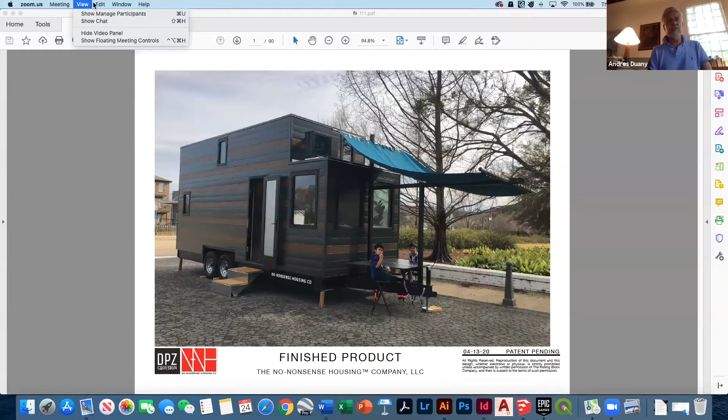Let's talk about how that manifests in these units. The first thing I'd like to show you is something I've been talking about for a long time, which is something that Liz said: the one universal form of adaptation is retreat. You basically move away from trouble.

One way to confirm this: Alex Krieger at the Graduate School of Design at Harvard gave a very good talk two days ago, speaking about how Americans actually solve their problems by leaving England, by leaving the East Coast, by leaving the older cities, and establishing new towns and new suburbs everywhere.

He said it's not for us to stem the leaving, it's for us to make sure that when people arrive somewhere, they land in a good place. He also said small cities and towns actually have a future, which is something New Urbanism has been talking about for a long time.

This little unit here, which we designed, is a tiny house. It's extremely comfortable, 230 square feet, licensed by the Department of Motor Vehicles, so you can actually park it in a parking lot and take it away from trouble.

Trouble isn't just about moving away from a flood. Trouble lasts a long time—to rebuild your town, to wait for your insurance—you can actually move away with one of these. It also turns out these are popular when you have disease.

So we call them isolars, which is Spanish for isolate. You can actually live comfortably in these, parked in any parking lot.

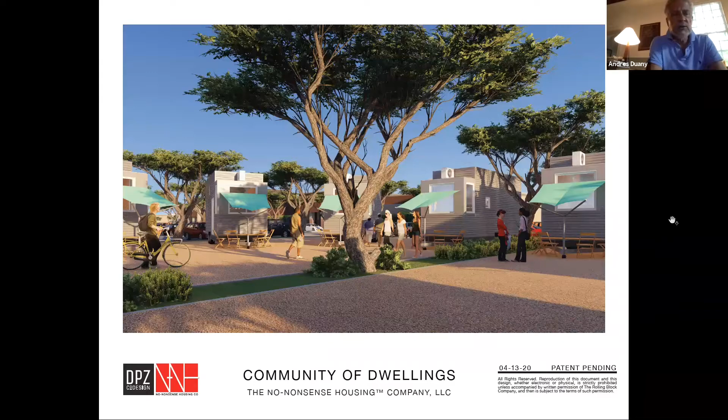There's an infinity of parking lots available in America that are not being used. They're perfectly drained, they already have footings, and they're looking for a use. A lot of these parking lots are also in downtowns, waiting for the next high rises that are not going to come for a decade or so.

They can be very sociable. By the way, these are not inexpensive units—they cost $70,000. They really are not for the homeless. We also have homeless units, but these are actually for people who have jobs, but in a gig economy, they may have to move.

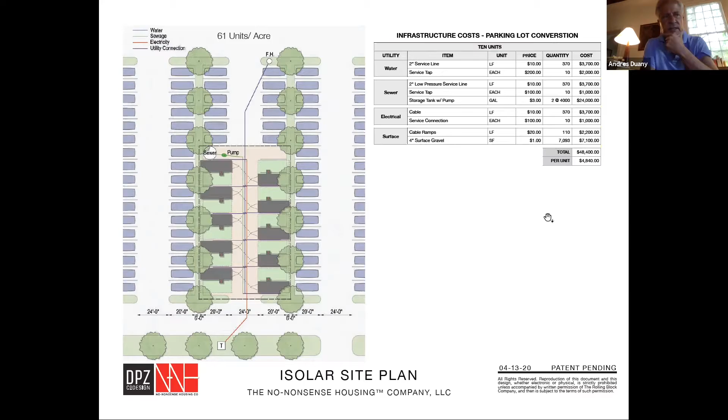This is a more typical arrangement here on the left, where they sit on a standard issue. One of the great things is that parking lots are absolutely standard all over the United States, so they can be leased.

Now, this is a project that was finished and accepted by the city of Vero Beach. It's a very large site on the water where they've decommissioned a power plant and a sewer plant, and we were asked to design a place for people to gather.

We designed it with very naturalistic landscaping—very ecological, lots of wetlands. It was all about crowding, about how do we get people in festivals to be face-to-face. It was all sociability.

By March, we realized that was ridiculous. I couldn't even make a presentation about that kind of human density. So we redesigned it, and quite a few things came up.

The pools and the wetlands—the wetlands became a pool. That very large pool in the middle is actually for the children of the town. There are hundreds of kids, and they don't necessarily infect each other, but they have to have a place to go. By the way, these are for the regular kids of the towns, not the rich kids.

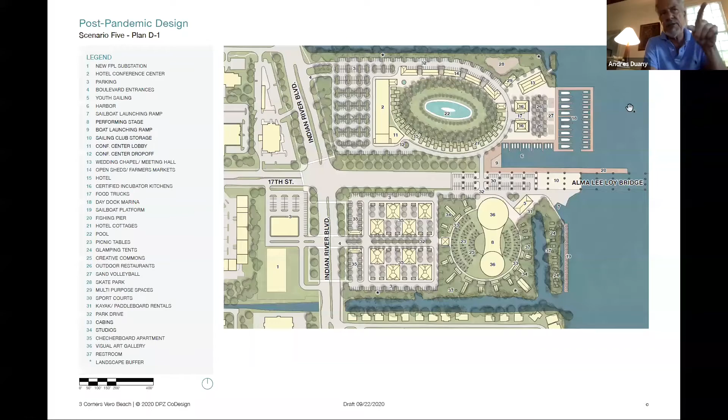There's a sunny area all around it, surrounded by a grid of trees and palms on 20-foot centers, which, if you imagine a blanket or a picnic table on the ground, is the use of landscaping to separate people automatically. A 20-foot grid is too tight for a shade tree, which is why we alternate palms and trees, so lots of people can sit by themselves.

On the side, you see the circle of small units? That used to be a hotel. Now it's a bunch of cottages, because the hotels are all dead. No one wants to share elevators, no one wants to share aisles. The cottages, which is actually the original way of hotels in Florida, are a completely different market segment. You're on your own, you can open your own windows, you don't share air conditioning. So that's a new kind of hotel.

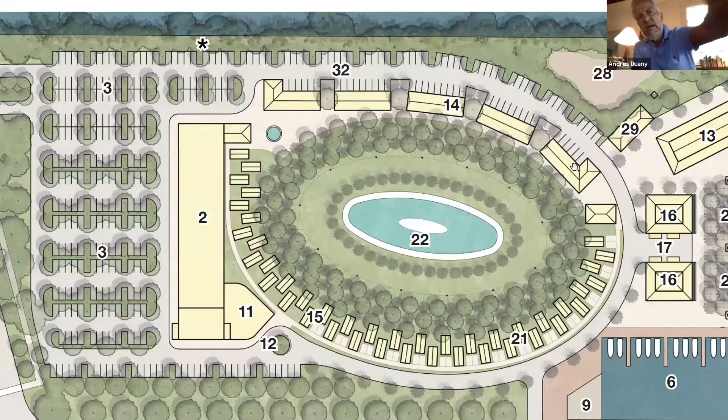Over on the back here, these are open market buildings. Some have a little bit of air-conditioned space for administration, but they're open market buildings. Trucks can pull in not only for farmers markets, but they're multi-purpose spaces. All those 14s are multi-purpose.

Over at 13, there's a civic building that can be used as a wedding chapel or for City Hall. What we did is take, imagine the Seaside Chapel, but put a big skirt on it that allows doors to be opened. So it's all about opening.

By the way, here, number 2 on the left, we knocked down the plant but not the turbine hall. This is a beautiful tall turbine hall, which is a conference center. Because it's thin and one big room deep, you can open it for cross ventilation.

16 are two restaurants at different price points, mostly open space, mostly outdoors, and they're fed by food trucks in the middle, so they alternate.

And then over here at 26, we have a sitting area. Perfect spacing occurs at 10-foot grids, 10-foot centers, and that can also be done exclusively by palm trees.

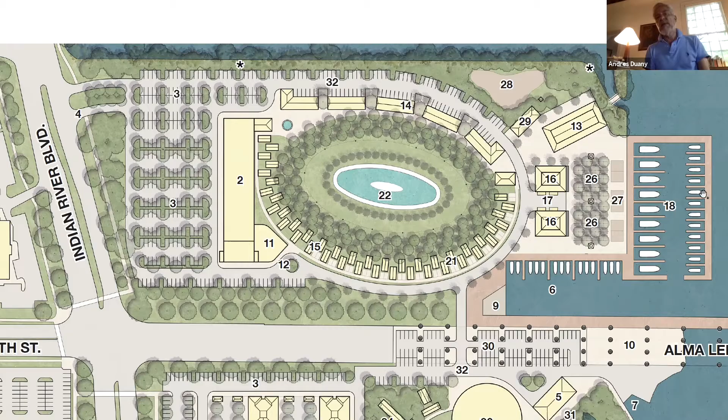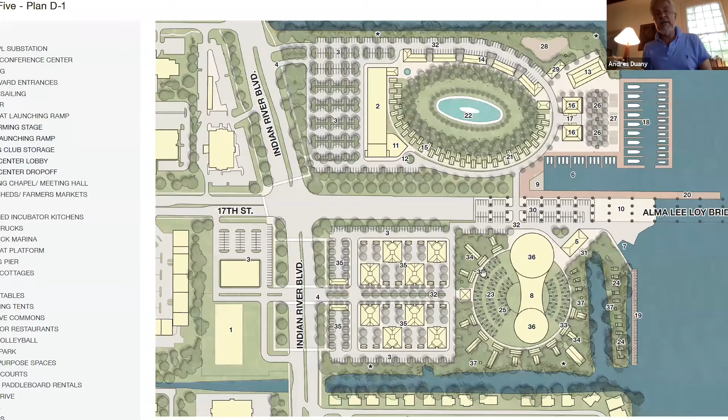Now on the other side, to raise funds, there are apartment buildings, as you can see, on a checkerboard, just 4 apartments to the floor. There's almost no lobby space, no elevator, they're walk-ups—I'll show you the plans later. Every one of them has cross ventilation, and the parking lots are actually turned into courts. You can see those courts, but they're not aligned, they don't share party walls, and there's a single means of egress.

Over on that circular part, those are two empty clean water tanks. We put an awning across it as an open air stage. Instead of having people sitting and keeping them apart, those are all little picnic tables. I think the great tool of urbanism is going to be the picnic table. It sits up to 6, it can't be moved, so the spacing is automatic—you sit 6 at a time. By the way, if you put a footing on it and it's a really good concert, you can actually dance on the table. That's pretty cool too.

On the side, they wanted to have a visiting arts group. What you see here are the thin houses, 2-bedroom, essentially mobile homes, but nicely designed. And in the back, just like Chautauqua, New York, there are different studios for dance, for sculpture, for painting, for piano, for different musics, for ballet.

Now this brings up an interesting point. If we're going to have a one-room schoolhouse, we're going to need school teachers who also isolate with their families. This could be a typology, not just for music teachers and summer festivals, but actually this might be a school—the teachers living with their dozen students, with their classrooms right behind.

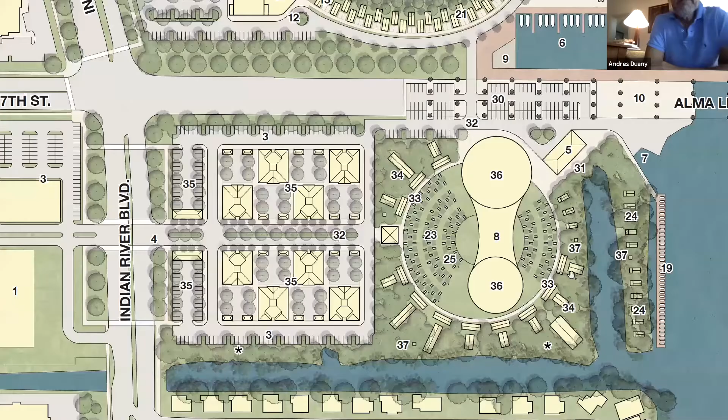So here you see it from the air. I think you can identify everything that's happening—there's the turbine hall, you can see the little hotel with the cottages, you can see how wonderful this grid of trees is, the open air markets, etc. And on the other side, what I described, picnic tables in perfect spacing, and the apartment buildings. It's a totally new kind of park—neither new urbanism, nor landscape urbanism.

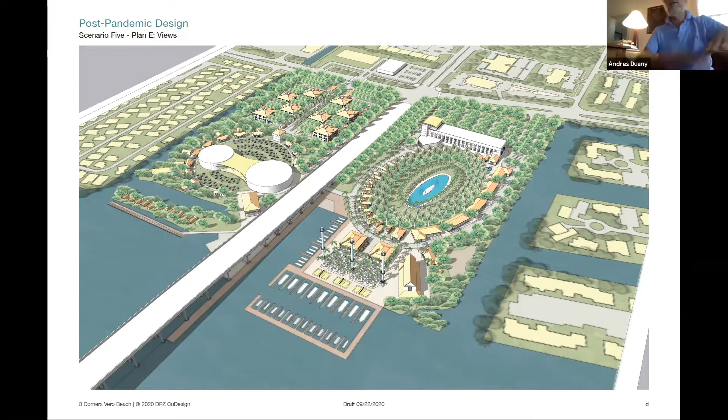It's more like the formal French park with the bosque, the grid of trees being the fundamental element of design. It's all about light, air, and sunlight. You see here, here is the outdoor dining on a 10-foot grid of palms, works perfectly. You can see the outdoor restaurants.

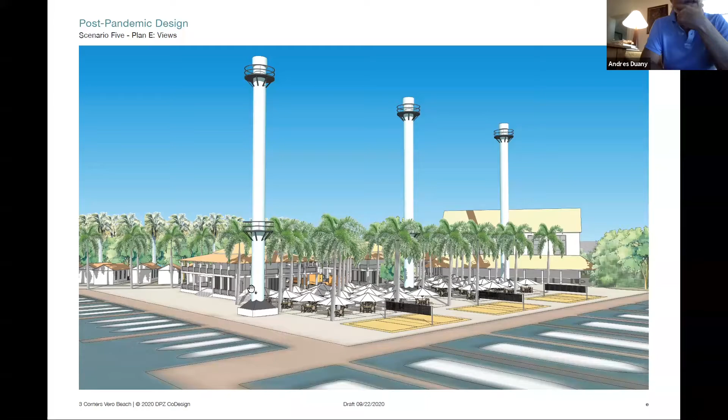This is the old chapel based on Scott Merrill's chapel at Seaside, but it got a big skirt so people could hang around outside and French doors could really open.

This is a typical market building, big overhang, trucks can pull up, and a little bit of air-conditioned space for administration, etc.

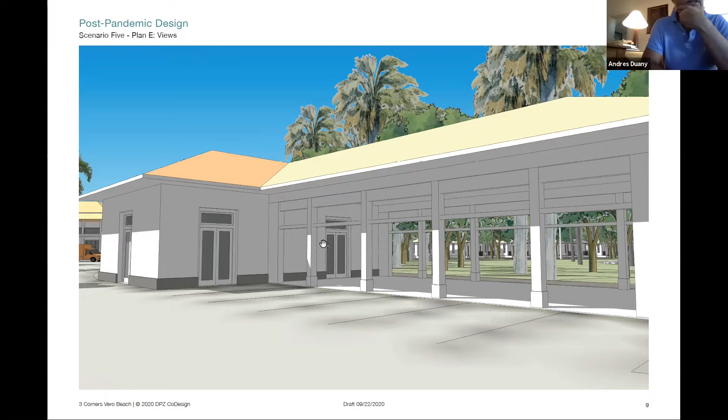These are the restaurants, open, open, open. Originally, they were all open, there was no internal space at all. But someone said that in case the pandemic did get over, we may want to have our own kitchens and not just depend entirely on food trucks.

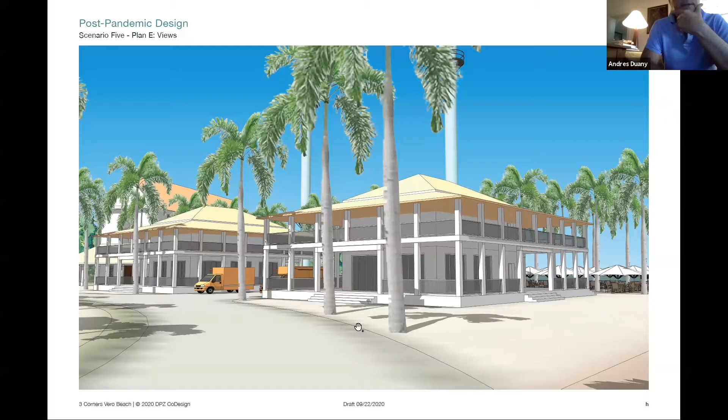And this is the hotel. By the way, this seems amazing, but it parks itself in those little indentations. Not only do you get little private backs, but you get terrific parking.

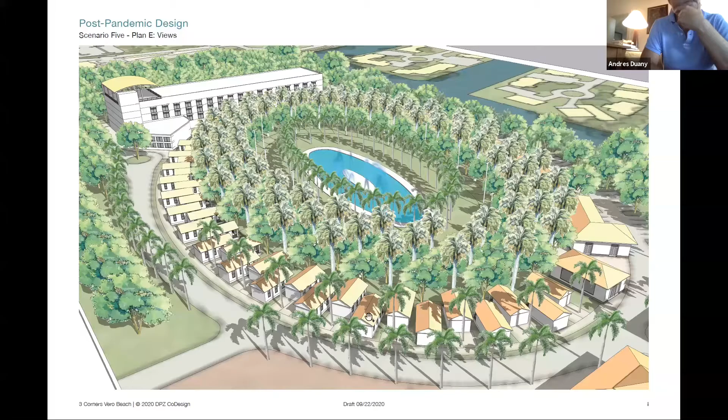And roof gardens, roof bars on the top, that's one of the great discoveries. It's happening all over Florida now, bars at the top. By the way, all this can only happen in Florida climate. Don't try this in North Carolina because you lose half the year to the cold. This gives Florida a tremendous advantage. The combo of light, air, and sunshine year round makes Florida a very good place to design for.

There's the pool. I don't know what the precedent for this is, probably Venetian Pool in Coral Gables, but it actually reminds me of a pool I played with as a child in Cuba. It was just a huge, shallow pool full of children, and it had an island in the middle. Now that island at night can be a water feature so that people can also come at night to enjoy it.

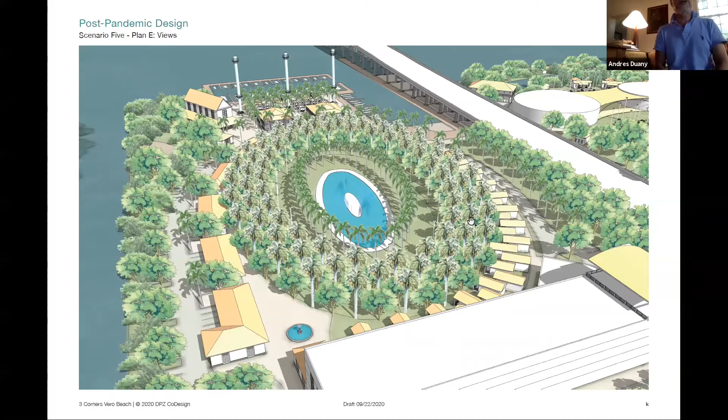There you see the apartment buildings in the back with the perfect ventilation and also the picnic tables in front. And there's the school with its classrooms and dwellings for teachers.

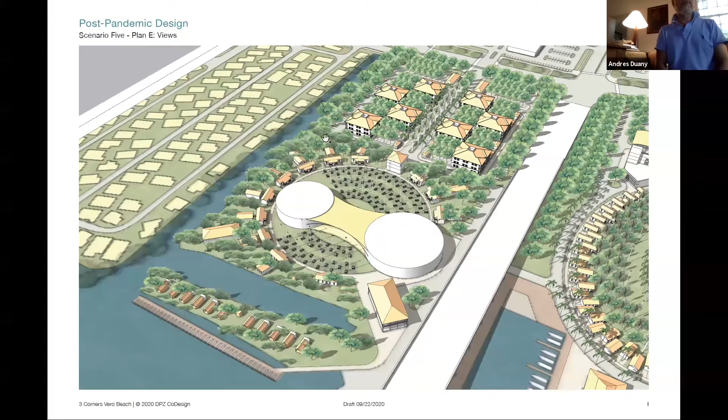Detail, glamping. New kind of urbanism, which is not packed tight, and the parking lot is used creatively. The parking lot is not always in the back, it's sometimes in the front.

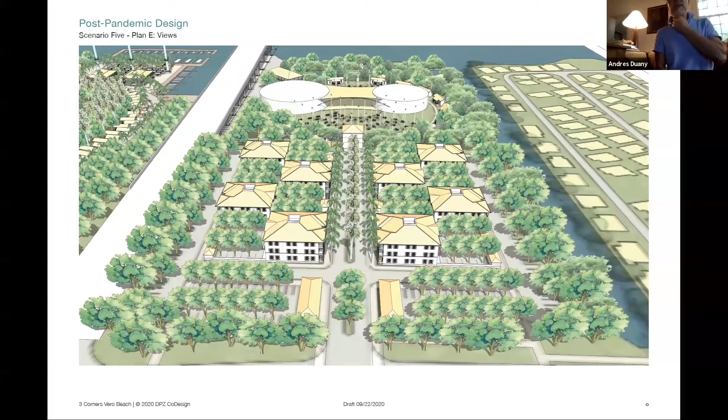It's like the forecourts of Paris, you see how they work? So there's parking lots with trees. The buildings don't have to face each other 10 feet away.

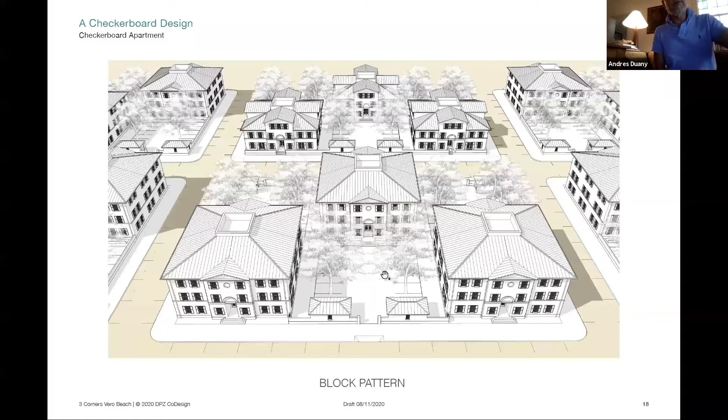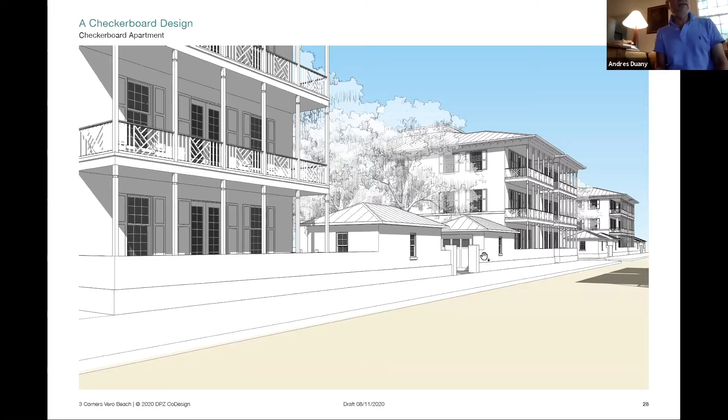And this is what it looks like from the ground. The key to this is that the first two cars are parked in indoor garages, so they're masked from the street. You really don't see the parking lots, and they actually act like very elegant forecourts. It's a nice street.

Now this is a hypothetical town we designed for Colorado that brings up a whole lot of interesting issues. It's one of the places that might be a receiver town, or perhaps one of these towns that people flee to. I could speak an hour on it, and I have, but very quickly, what I want to bring out here is that there are different levels of governance. So this is a town of about 8,500 residents, and it's got things you recognize.

It's got a solar field on the left, energy harvesting, and then food harvesting on the right. It's got recycling in the gray spots in the corners, and it has a central green, very open, with let's say shops and restaurants, etc.

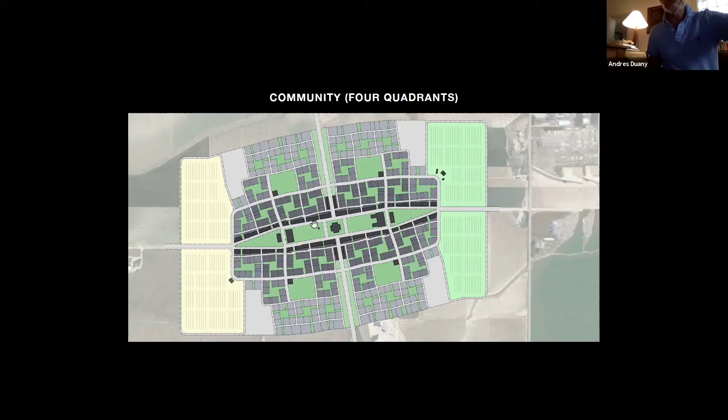Now it's got 4 quadrants. Each quadrant has a green, and that green is governed by the people all around it, and they decide what happens on that green. It's large enough so they can decide if they wish to have their own school, their own market, or whatever they want, sports fields, etc. So they can decide at this level of about 2,000 residents what they want at that point.

Now each of these little things is the next scale down. Each of those is a compound, so 8 of those made what I just showed you. Now, 8 of these, it's fractal, 8 of these make a smaller green in which a different set of decisions can be made. For example, they can have an open air pavilion, a little garden, and above all, I think they'll probably decide to have a schoolroom.

But whatever it is, they are funded by a portion of their taxes to decide at that level. Those are called clusters of compounds. That's a cluster of 8 compounds.

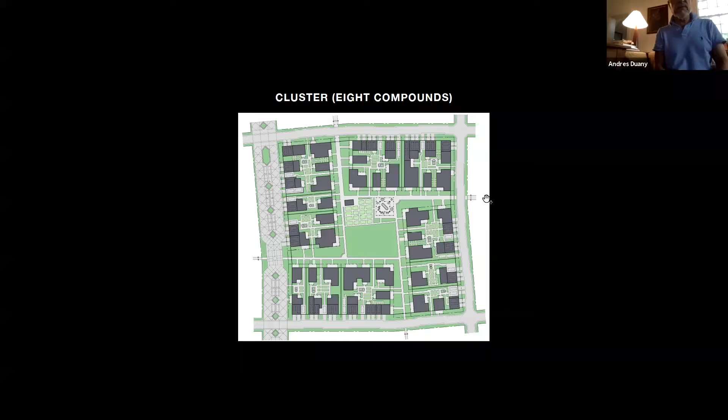Next, each one of these that you saw is a compound. That's 120 feet by 120 feet, and you're allowed to build up to 6 buildings.

A person can decide to assemble their own society or household in such a way that is self-sustaining. For example, you might decide to have 3 generations, or 2 workshops, and house your workers, 2 or 3 people that are great carpenters working in your mill shop, or a couple of young people to protect you, tough guys or tough girls, and people to take care of your grandmother, caregivers.

But the idea is that the compound in the future becomes the fundamental dwelling. The other thing that comes up here is the garage actually becomes the front.

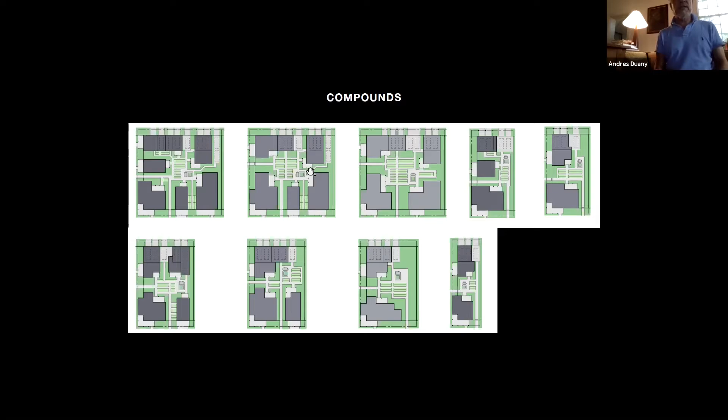Okay, let's see the next image. See this image here? So what you're seeing is a walkway. There are really no streets. What you have are walkways that connect to each other, but also the garages face the alleys. And those garages are those convertible places that I showed you last time that could be the workplaces or anything that you want. So this is the fundamental reversal of the new urbanism.

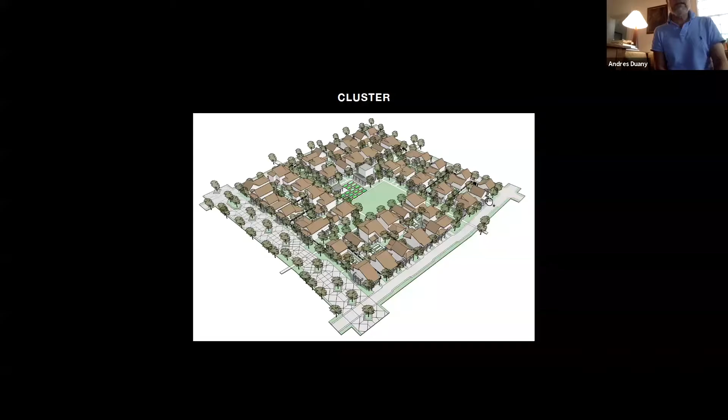This is a cluster of 8 compounds. Next, here it is developed in an East Coast manner, more East Coast architecture. This was developed actually for Oklahoma, for a client that we have there. This is what fits in 120 feet by 120 feet.

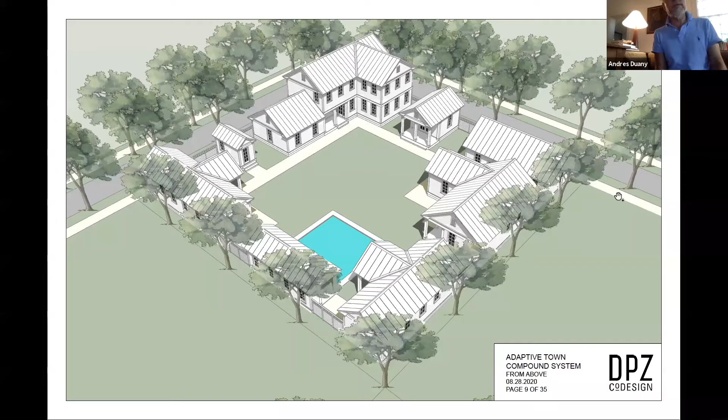And there's a lot of choice on these units. These are different programs that are being placed in this 120 by 120. Next, here's the choices. You can actually select a main house. These all have different programs, from a full house with bedrooms to one that just has public rooms, the second one. There can be dorms, houses that have nothing but bedrooms.

There can be garages, which are nicely designed to be convertible to other things. You can have retreats, places where you can store your groceries for all the dwellings, places where you can retreat to be yourself to work, places that can be small schoolhouses or workshops. And then finally, you can have a bit of a recreational place that's shared. Of course, everybody has a porch, but you can have a place that's a pavilion with a pool. And you get to select these, and you can see you actually are taken through this piece by piece.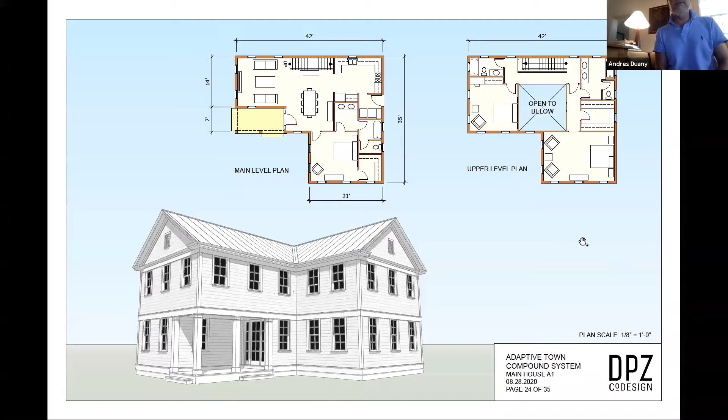Next, this is a house that has no bedrooms at all. It's a house that's designed to be just the center of the whole compound. No one lives in it. It just has a big screen, big eating, big kitchen.

Next, this is what we call dorms, just these places where you can very inexpensively buy additional beds. They're dependent upon going elsewhere for your meals.

Next, and then these are the garages, which I think are fundamentally important, as you've heard me say.

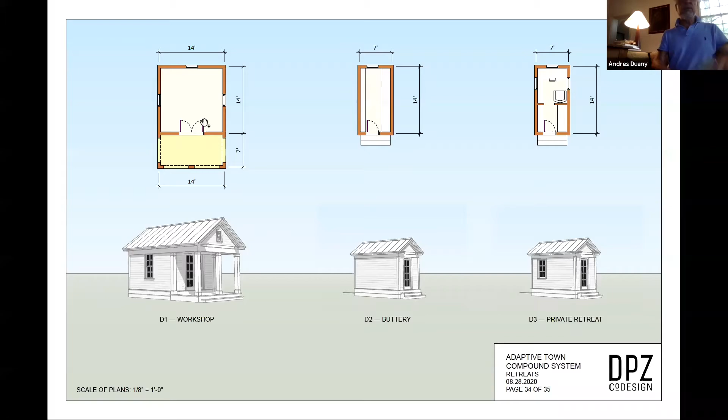Next, these are the various retreats, little places on the right. That's a writer's place, you see. I've seen, that's John Updike used to have one of those. And this is a larder on the left, and this is a classroom. But there are many others possible. And they each have a price.

Next, and then these are the pavilions, in this case associated with pools. Next, and so you're taken through it.

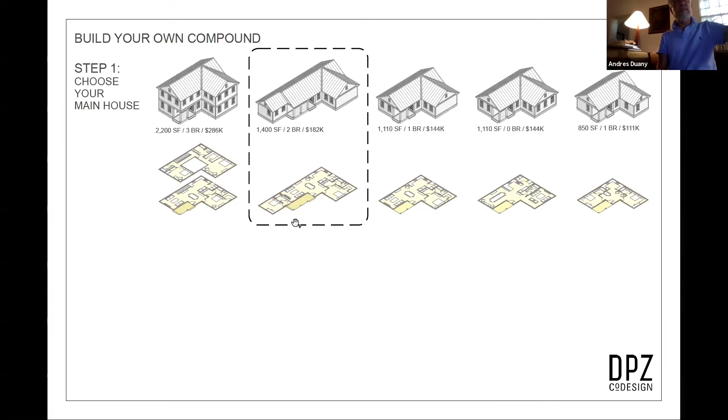Step one, choose your main house. And so the potential resident chooses house 2. They know it costs, it's 1,400 square feet, costs 182,000. They know the program. And you take step 2, step 3, step 4. You get taken through every one of those types, and you assemble your society.

So here's what these people chose. They chose their main house. They chose 2 dorms, which you can see there. They chose both garage types, they wanted 5 of them. They chose retreats, and they chose the large pavilion. Then you assemble them into the 120 by 120 compound.

So this is the fundamental element of society. It's not just the household. What happens now is that there's nothing between your dwelling and City Hall.

Like if Liz and I want to do something in our house or on our street frontage, it has to be done at the level of City Hall, and it has to become generally applicable to all of Coral Gables, which is to say it's impossible. But there's a series of decisions that should be made in a subsidiary form. The compound makes a series of decisions, the cluster makes a series of decisions, the pod makes a series of decisions. And then some decisions are made at the level of City Hall.

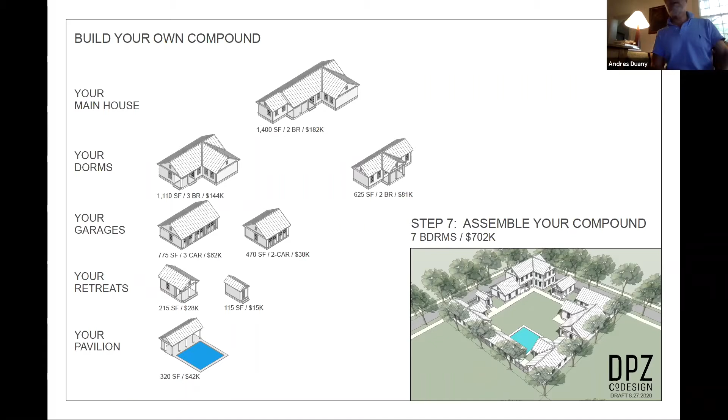This kind of programming is extraordinarily important, I think, in the future. It should already be happening anyway.

Next. And so the inside is like this, very standardized details to include, to make things easy to build and to price them properly.

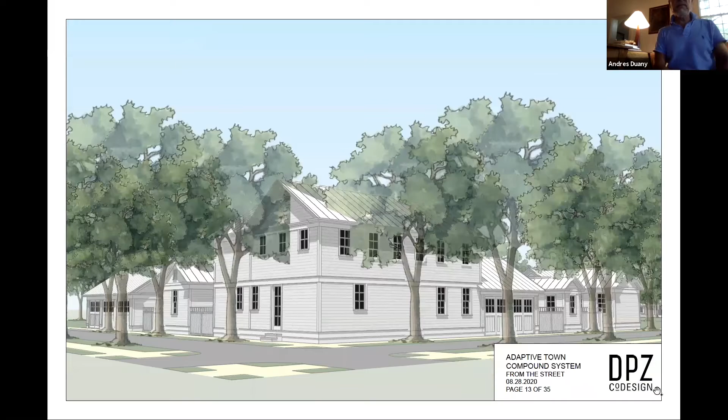That's the big house. Notice, by the way, that the compounds tend to look inwards. That's an alley that you're looking at, but they tend to look inwards, and that bothers some people.

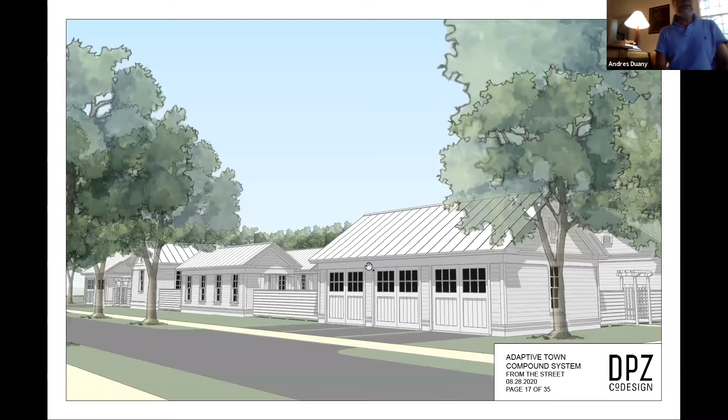These are the garages, which you see are very nice looking and convertible. But there are entrances, it's not so much backwards. This isn't that different from first-rate suburbia. It's not porch oriented; the porches are towards the inside.

Your society consists of up to 6 households, primarily. Now people say, well, that's big and that's expensive. What's the smallest possible compound? Well, we designed this one here, which I believe is 30 by 40.

30 by 40, it's got its own internal yard, its own internal courtyard. And it has a very economical living and dining room with a screen, a TV that rotates or 2 screens, and there's a kitchen. There's a master bedroom on the left, no holds barred, and there's another one on the right.

But you can also, very easily and at almost no cost, cut it into 2 smaller bedrooms. So now you have a unit that's about 800 square feet, absolutely secure.

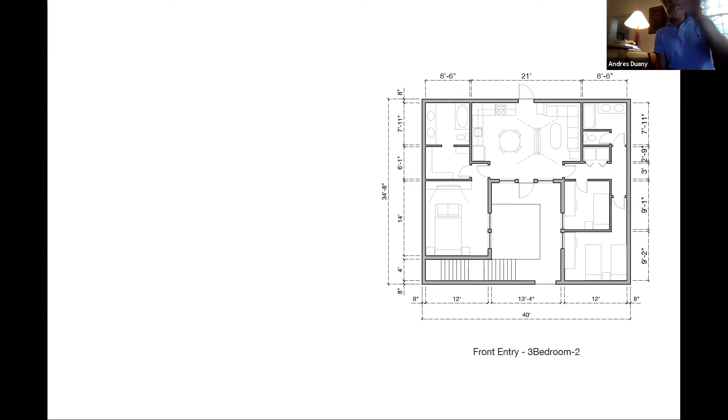It's got no windows facing out. You have your own courtyard. You're ready to go and not bother anybody. You can have a hobby in there. You can have the kids run naked in the sun. You can actually protect yourself from marauders. Whatever your scene is, you can do it internally.

Now this is the smallest and cheapest. There's your little house. It's got a sloped roof. You can keep your own water. Very inexpensive to build, and it confronts the street with awnings, which cost $7 a square foot. They're really great, and they're really good looking. So that's what you have for your street.

This is one that doesn't grow, this is just the kernel. This is essentially affordable housing for tough places. And by the way, the tough places of the future aren't just going to be Detroit, they're going to be tough places everywhere, with migrants everywhere.

Next. But you can also buy this unit. This is a very similar floor plan, but it has a thin layer on it that contains stairs to the rooftop, and also some storage for machinery. And the wall comes forward to enclose an area that can actually be a forecourt that protects your cars, so your cars can park in there.

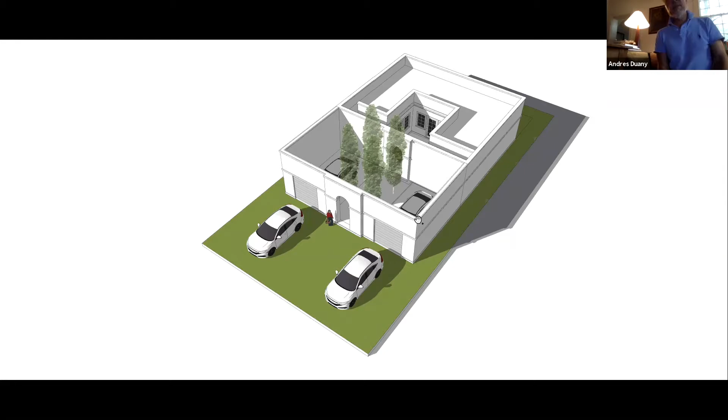But the cool thing about this is that it's a convertible space. So this is a house in which you can actually infill the front with the program that you want. You can infill the back, there's some setback in the back, and you can infill on top. So you can create your own compound.

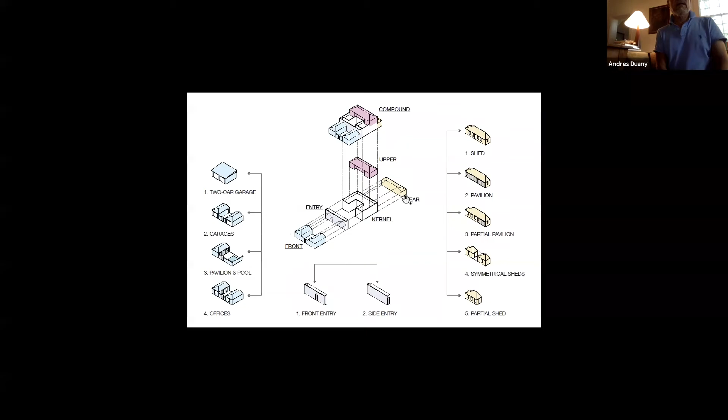Next. Okay, so this is what it looks like. There's the kernel. So there you see the kernel in white, and you can see what you can do. You can put things in front, you can put things in back, and you can put things on top.

Up to 7 bedrooms and 3 dwellings. It can be even more, but it's very easy to make 3 separate dwellings and 7 bedrooms. And that actually assumes you're not converting the garages in front. If you have those 2 wings in front convertible, you can have 2 more dwellings and 2 more bedrooms, because there still is a 25-foot setback in the front.

But look at the kit of parts that you have: garages, pavilions, and pools. You can have partial and full pavilions, little outbuildings in the back, ADUs to your heart's content, a whole dwelling on top where you can run your business from the upper floor. You see what I'm saying?

Now, guess where this fits? This fits on a 50 by 100-foot lot, meeting all the setbacks: 25 to the front, 5 to the side, 10 to the rear. So yes, you can build your own compound in a standard American 50 by 100-foot lot, and it doesn't even need an alley. So compounds aren't just for the wealthy in Hollywood or just for the famous. Actually, this is a delightful and very flexible way to live.

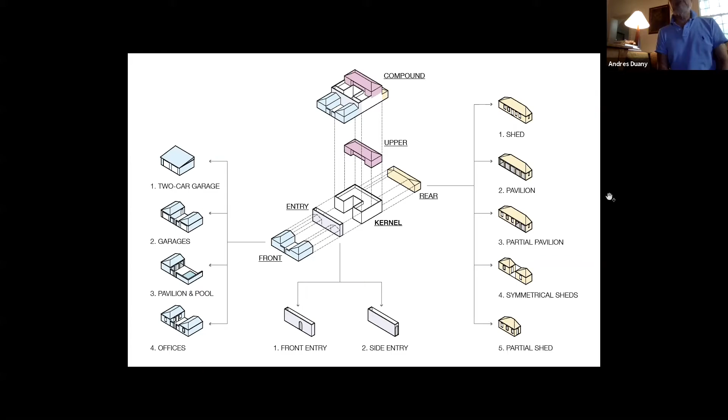We immediately were able to deploy these ideas. This is a project we did in the Philippines that is very similar, so I'll hardly describe it. The only difference is that security is much more intense in the Philippines.

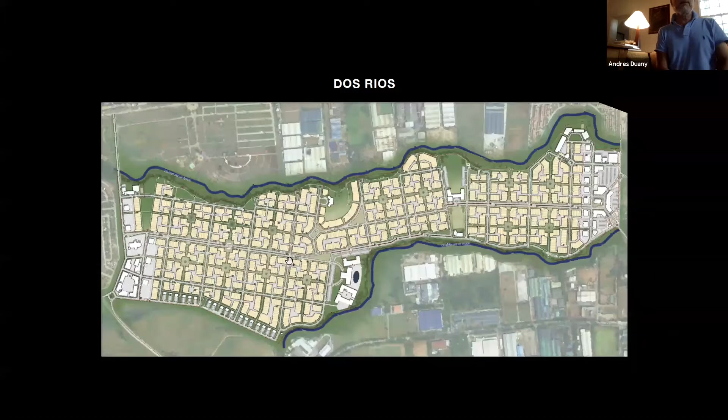So this is the project. It's quite huge, between two rivers. It's called Dos Rios. You can see the basic increment, the pods, and how they aggregate. You see the systems exactly as I described in the Colorado project, but much more elegant and much more serious about security. So there's the compound, the block, and the section.

The red line is the security perimeter. Most of it is built privately. If you look at the compound on the right, as you build your houses, you have to be able to secure the edge that you're given in red, and four of them secure that. Then there's an additional level of security, at which point you can have a sereno, basically your own policeman, your own maintenance people, etc.

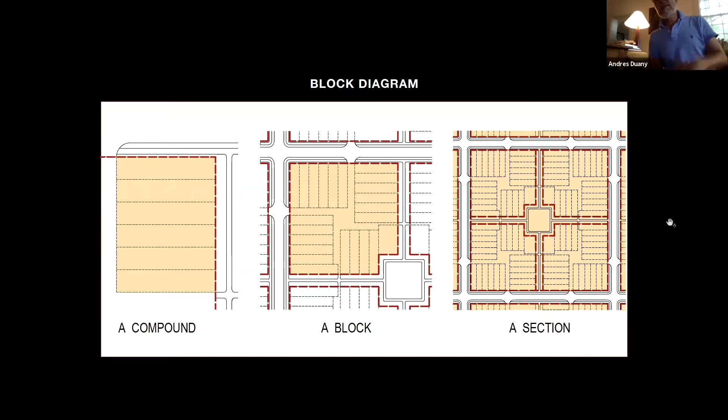So in a place like the Philippines, where governance is really melting down, they're really pioneering what might be our future. And these are the floor plans.

They can be courtyard houses or not. They can be very large, they can be very small. One of the nice things about courtyard houses is that you can mix incomes very easily. The alley on the inside here is, of course, going to be the playground for the children, that's where they meet.

The kids don't play on grass, they play on pavement because they have wheels. That's what they do now, they love wheels and skates and so forth. So imagine that the pavement is like a square and it's shared by everybody.

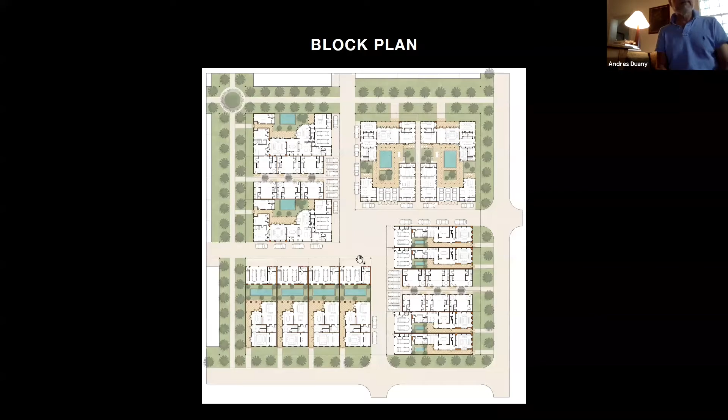And by the way, it's highly overlooked. This is not our standard alley - you see the balconies facing the alley. What I love about the alley is that nobody bothers you about it. The traffic engineers in the Green Book have nothing to say, and there are no setbacks required, so you can really design tight, intimate spaces.

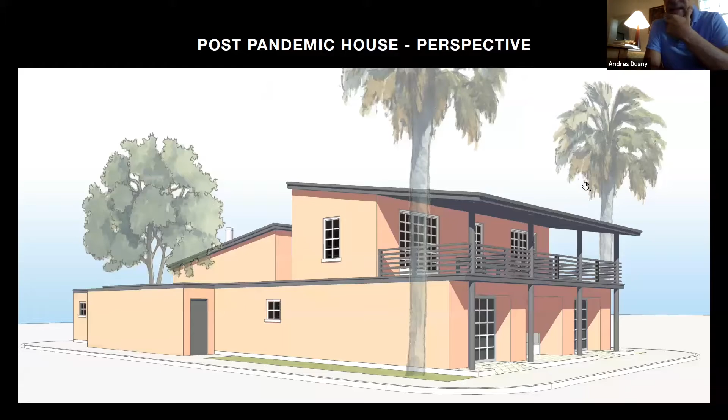Now, this is a house, it's actually just a post-pandemic house, and it's really thought through for a lot of things, including not only working at home, but social insecurity. Notice that there's a new aesthetic here - this aesthetic is very close to a warehouse district. It's not the flashy, romantic aesthetic of 'I am wealthy,' the McMansion.

It's not the romantic aesthetic saying, 'oh, you're all welcome, we love you all, this is our porch with the cute Victorian ornaments.' No, this is tough, okay? We thicken the walls visually, as you can see, and it's all metal - a whole metal armature welded together. You can beat it up all you want. And so the entrance is also in depth.

By the way, it is sociable, except the sociability takes place from the second floor, as it does in New Orleans. Sociability is not on the first floor, it's on the second floor. And notice the aesthetic ended up looking a little bit southwest, but above all, it's 'we're tough, don't mess with us.'

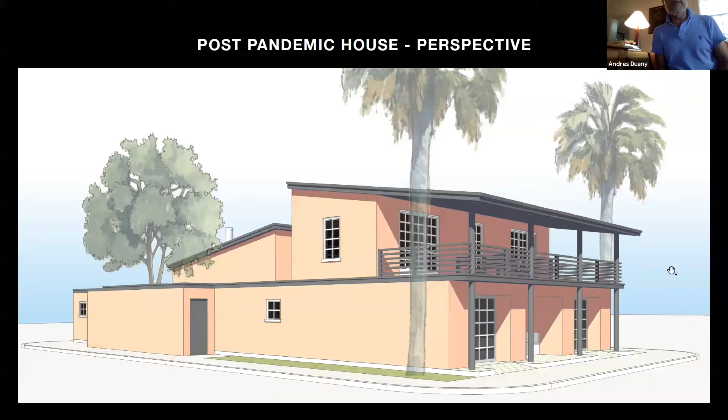So here's how the plan works. You have two cars, now separate, and the garages are extra wide because they're conceived to be future offices. The reason we split them is that you can turn one into the office and keep the other as a garage, or have two offices, or one as a workshop. Either way, the garages have good tall ceilings, etc.

Now here in the center, those two benches I showed you on the outside, that's a place where you can meet people outdoors without having them enter your house. The sunlight comes in, so that's a place you meet people - happens all the time now. Now there's a cleanup room, a place where you leave your stuff and put UV light on it, taking off whatever you want.

You don't bring all the crap into your house because it might be infected. And of course it has a sink, so you wash your hands and leave the stuff out there under UV lights. Then you finally enter the house.

The house is pretty conventional there. On the right it's got a kitchen with a booth, but the kitchen has a workstation, so people are working in their kitchens all the time with computers. Let's design it properly so it's comfortable, so while you're cooking or not, the electricity works, you have a printer, etc. The booth is there, so as usual there's a lot of sociability.

Now you enter the living dining, and here's the key to the house. The living dining actually opens absolutely to open spaces on the side for cross ventilation. These are NanaWall folding partitions, so you actually live outdoors. Your indoor is outdoors, but absolutely outdoors, not an outdoors that's vulnerable. It's also not a courtyard—notice how this is reversed from the courtyard. In this one, the courtyard is on the side, on both sides. Not only is it good socially, so kids can play in one and adults in another, but above all it's fantastic for cross ventilation.

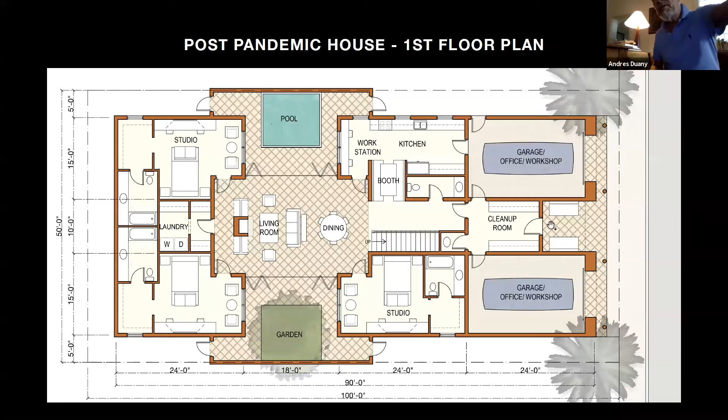Notice the opening there—that's above the benches. One of the things you realize when you make these places where you sit outdoors, the breeze has to move. If you create a dead end, something like a closed porch without cross ventilation, the droplets, the aerosols, are still infecting you. So it's important that wherever you sit, there has to be cross ventilation. This open-to-below is cross ventilation as well. This is all about cross ventilation. I repeat, this is not a courtyard house—this is a cross ventilated house.

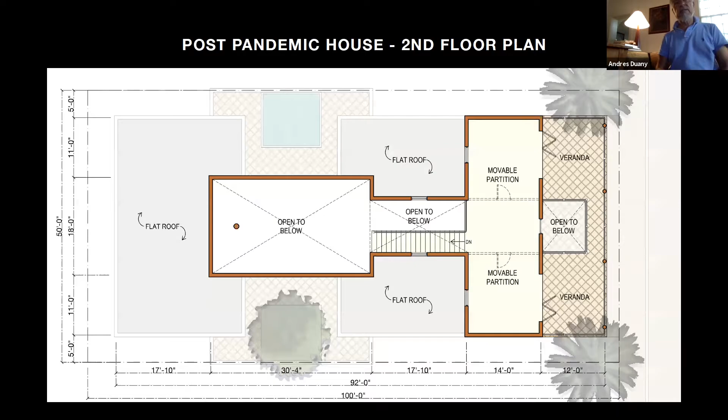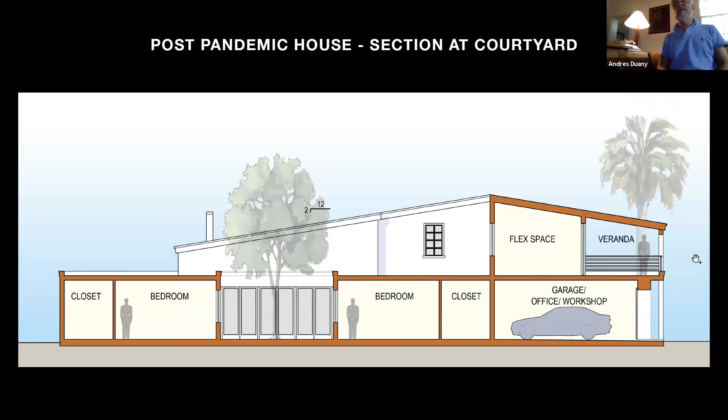Now this is how the section works. You can see the garage is tall, with a 10-foot ceiling. You can see the veranda, that's a sociable space—again, good for sociability. You have a lot of roof, by the way, and I don't mind flat roofs because if things get really tough, you might need to locate your own solar panels, since electricity may get to be sporadic.

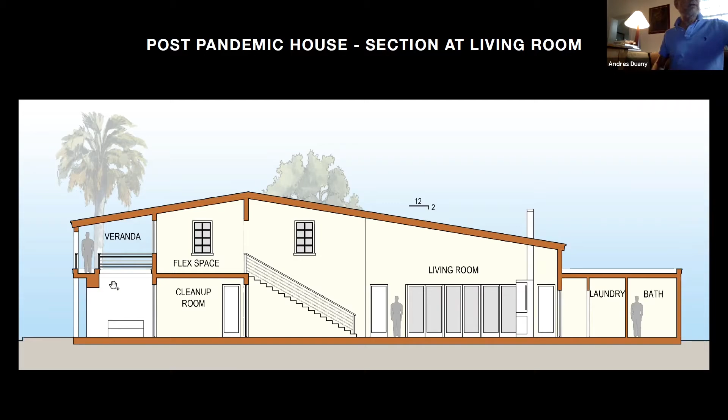Here's the section—it's really pretty sociable. Here you see the cross ventilation of the entry space.

And this is what it looks like on the outside. There are some fabulous garage doors now—they look like that, and by the way they meet hurricane code, so they're very hard to break. They're not your usual storefront.

And they stack as usual—DPZ is very careful with our privacy situation and with our density, and it wastes very little space. By the way, it meets all the codes or most of the code requirements. But you can see that there's an urbanism implied in this as well.

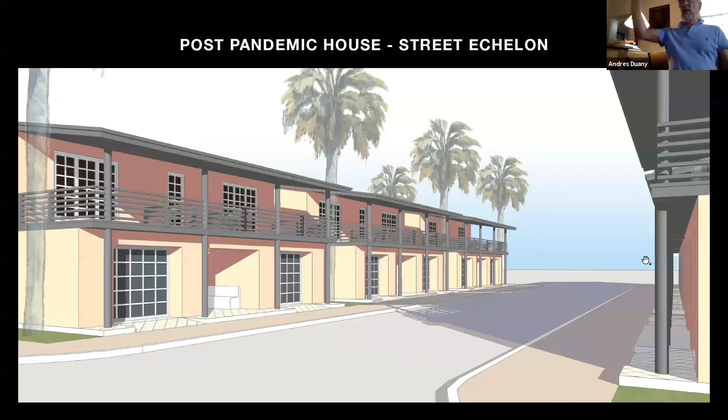It's not bad. And this is the street space. I can't tell you enough about the emergence of the warehouse look. All the cool places in Miami after Wynwood are actually converted warehouses—that's where people now want to live. It's the loft look that was for apartments that has now come down to the single family house.

But of course you can dress it up any way you want. This is for Windsor. If Windsor wants to build them, fine, we can get them to look like Windsor.

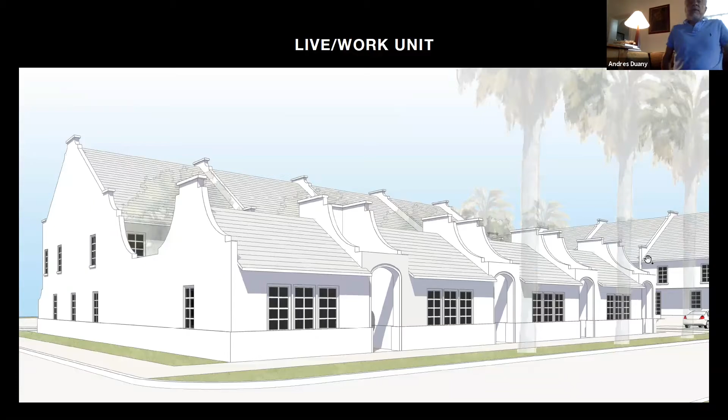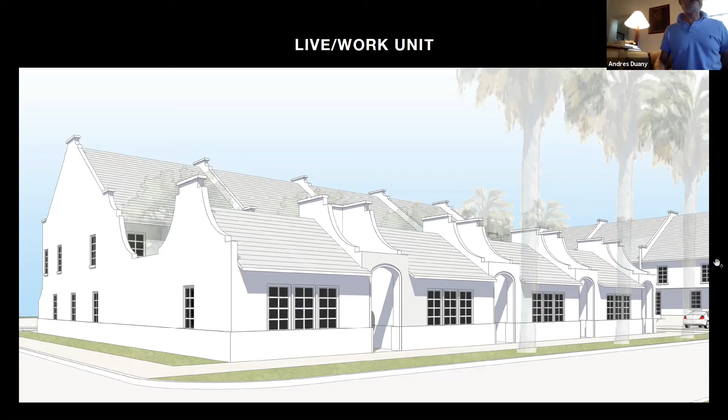Speaking of Windsor, we've designed a new kind of live-work unit, and it's very interesting. There's a lot of resistance to live-work units, and I had the aha moment: the problem is they bring the workplace into the dwelling on the first floor. They also discombobulate the balance of first and second floor because the workplace eats up a lot of the first floor, so you have to half live on the second floor. Instead of putting the outbuilding in the back, you put it in the front. So the townhouse is in the back with two floor plates of equal size, and the workplace is in front, separated by the yard, which would normally be the backyard but is in fact the front yard.

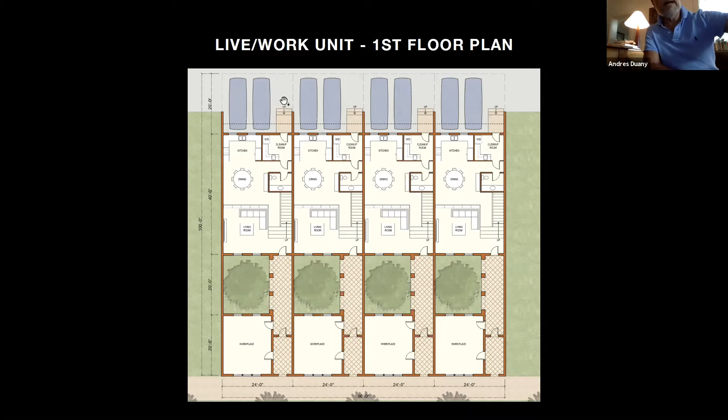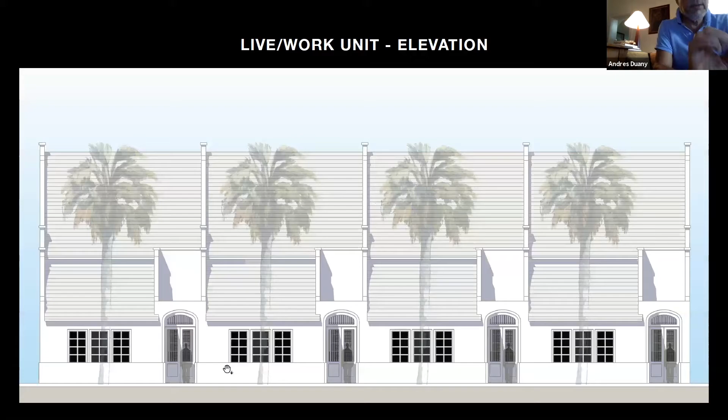Again, it's like a reverse unit. We build these all the time, but we enter from the front, and then we can't really use the back because people can't get to it. Or we screw up the first floor with our commercial allocation.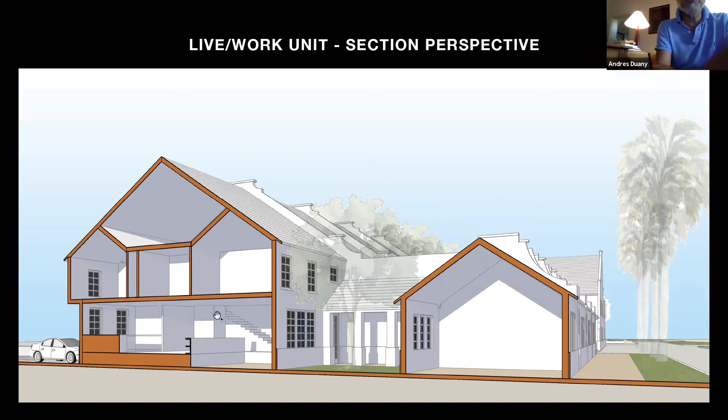So this seems to be very conservative, but it's only aesthetically conservative. It's actually quite radical in terms of layout of the program.

Now this is an apartment building, and these are pretty radical. The thing about COVID is that light and air and breeze are so important that the balconies can no longer be token — they can no longer be these thin little things we put in front that are only good for sliding glass doors. That room becomes the central room. It's got to be large enough for your parties, large enough for your exercise machines, large enough for your kids to run around, large enough to walk your dog, large enough so the cat litter doesn't stink. You have to begin designing the unit with an outdoor space that's serious, almost like the central hall of a Palladian villa.

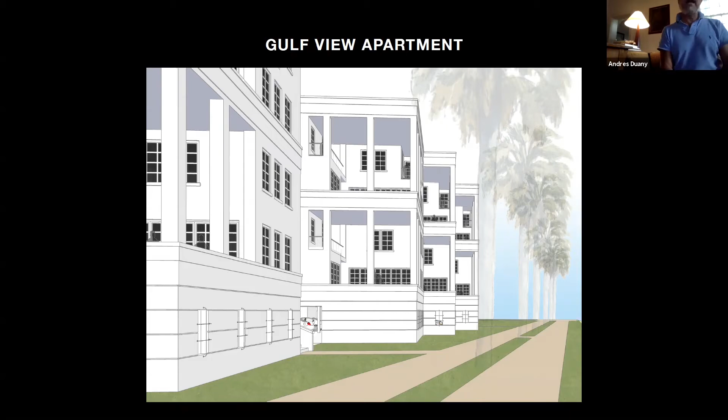You'll notice this breaks all new urbanist rules by being staggered, by being in echelon. Well, guess what — every single street in the world has a primary breeze orientation. It either comes from the left or the right, from the east or the west. This allows not only very clear views and solar access, but also picks up the breeze. So this is what the plan looks like — it still maintains street space, and as you can see the sidewalk's at the bottom.

So obviously you park underneath, and you want to have garage doors in your parking for yourself — you see the garage doors are here. The guests can park without garage doors. You also want as little as possible — you see what these things are back there? Those are storages for package delivery, where Amazon drops the stuff off without having to come in.

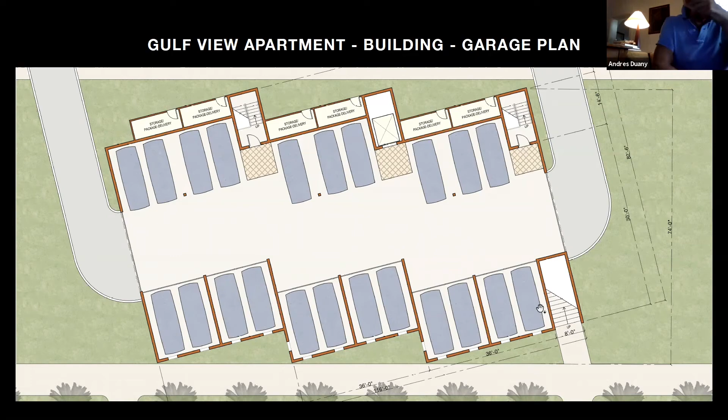Now, when you go upstairs, the hallway has to be outdoors, and there are very few apartments, so you tend to not meet people. These outdoor spaces are where you meet outdoors, so people don't have to enter your house. Once you do enter, you take a hard left, a hard right, and you enter the cleanup room, which in this case not only has the usual UV shelf and sink, but also a washer dryer.

Apparently enough people don't want to bring their clothing into the house that they strip right there in the vestibule. Then you enter and you have a living room, which is actually primarily a media room, because you don't really conceive of having guests. It's all about how do I entertain the people that live with me.

The dining area is very large because you may want an extra large table. Liz and I have guests with people we trust, but we actually sit them very far apart. We expand our table as much as we can so we have some modicum of distance. And here the kitchen becomes a very serious workstation, mixing the computers with the kitchen.

Behind it, we have a flex space. It could be a schoolroom, it could be anything you like. There's a big pantry to dump groceries, because we buy a lot of groceries now.

Now you go upstairs. Let's take the one on the left here. Upstairs, we use the fire stair to give access to a separate apartment. By the way, it's a skip stop — there isn't a hallway on every floor. It's very interesting, like the hallways below, and this is like a townhouse. So you can actually reach the back without somebody looking in your window.

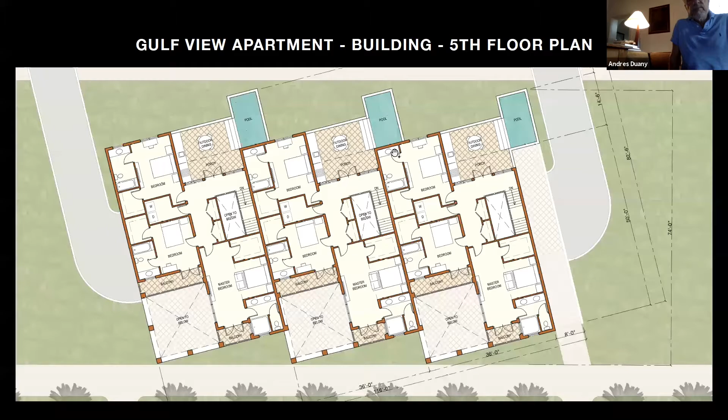This is what it looks like. Look at the double height space — it has balconies within balconies, lots of light and air. That's a NanaWall, a very large opening there.

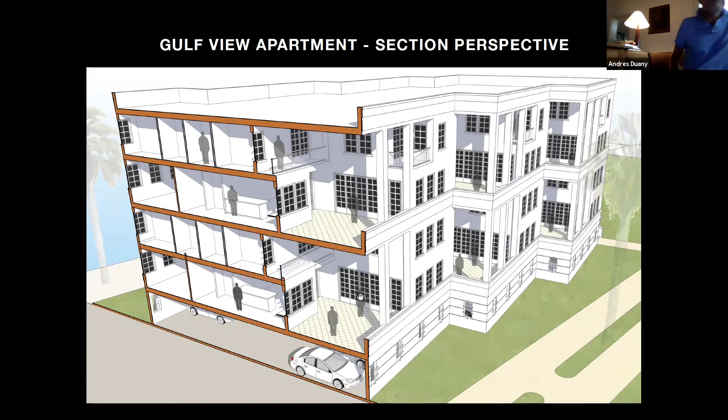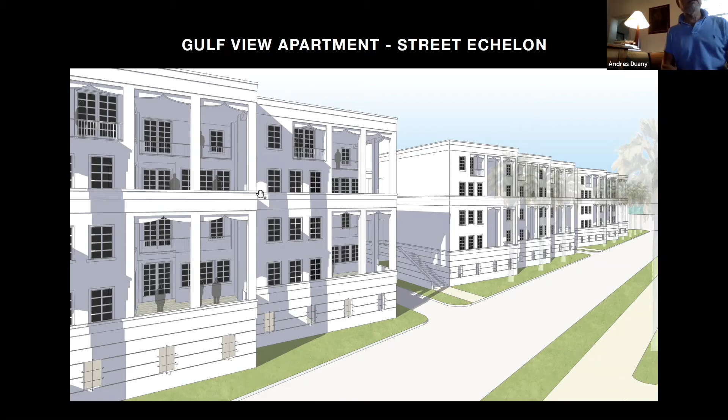And this is what it looks like. By the way, this is very repetitive, but it doesn't mean you can't have different architects doing different buildings on the same parti. These very large openings are very appealing, and by the way, they're very private. One of the things this echelon does is the balconies don't look at each other at all.

And that's what it looks like from the ground. You can imagine easily having lots of very appealing parties there.

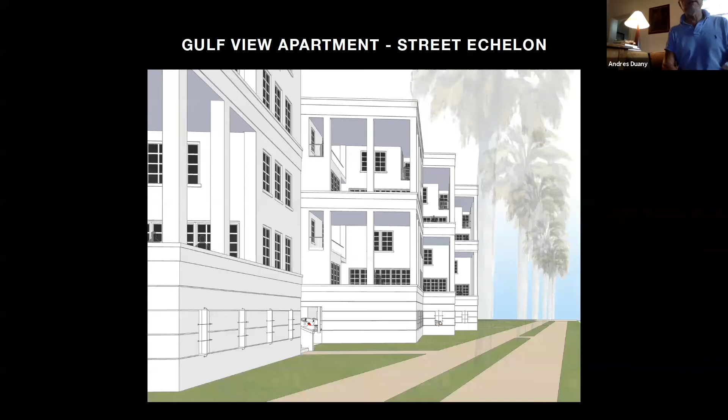Now, you may want to have a more conventional double-sided apartment building. That's also possible.

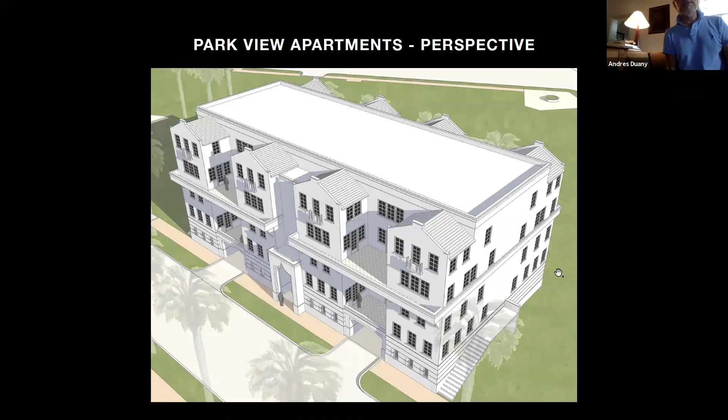And from below. And from above, this is what explains it best. You can see how you're actually sitting — the upper apartment is sitting on its own ground plane. And again, every single room has two orientations, and virtually everything has cross ventilation.

Now this is the last one. I think this is a new type which is at the intersection of co-housing, monastery, retirement community, and commune. It's really for people who want to live communally in small dwellings, but also have a society, and this could be done at some distance.

Now, this seems like a very big piece of architecture, but it's actually sitting on a 200-foot deep block. You see that distance? From here to there is 200 feet. So you can buy eight lots in any one of our decrepit cities and actually build this.

We call them retreats — you can build a retreat like this. It consists of a series of L-shaped units with two large buildings, one which has a large hall for certain types of functions and one which has a small hall. By the way, we've also developed these later to have their own pools. This one happens to have a pool shared between two of them, but it's quite possible to make one that has its own pool.

Next, this is what it looks like. The L-shaped units are perfectly nice. You can see the 2, and although it seems repetitive, it really isn't. There's the big garden space where the pool can go, or the little garden space, which is more sociable. There's a really elemental arcade with steel columns, kind of like New Orleans, very inexpensive, flat roofed. There's an administration building where the nurse to take your temperature can live, and there can be a shared pool.

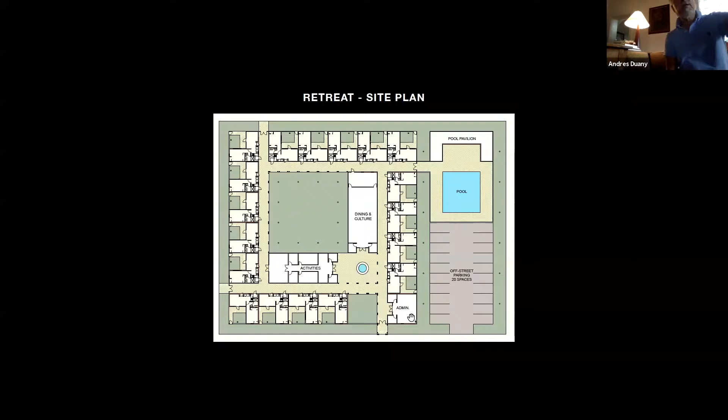Okay, so this is the next one. This is what they look like, perfectly private. Next, and the floor plan works.

Just a little detail here. If you're a retired person, you can have your own kitchen and the food can be delivered from here. There's a kind of workspace where you can deliver pre-cooked food and drop it into your kitchen without people entering. And this is where the cleaning, all the cleaning and everything is.

So this can be assisted living for an older couple. But it's perfectly good for a younger couple as well, or for a single person. It's perfectly good, by the way, because it's so lockable, if you have a partner that has dementia, they can live here as well. So this is a program that is not the institutional thing that looks like a hospital.

This is, a lot of things I think are converging on this kind of communal living. One of the most fascinating studies is to study the failure of the commune and the success of the monasteries in the Middle Ages. Very interesting typologies.

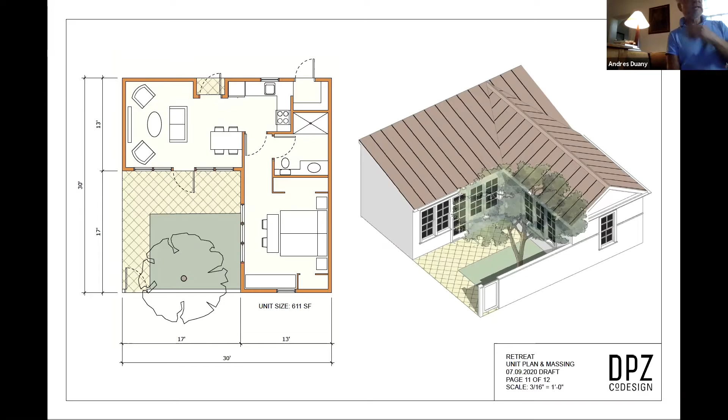Next, it makes a nice presentation to the street, nothing that the neighbors could complain about. Next, and then here you see the very inexpensive arcade. These are the two civic buildings.

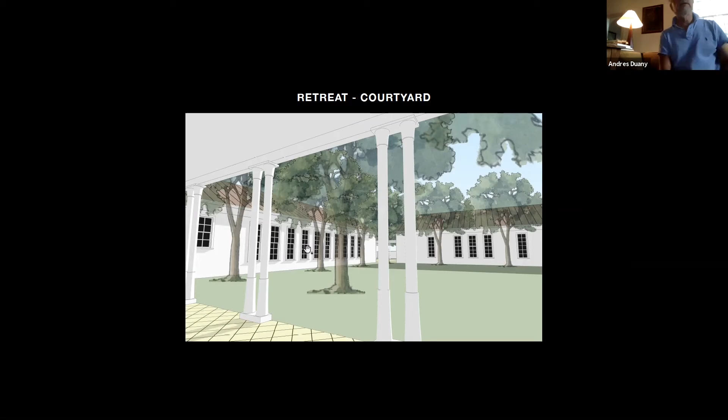Next, and this is the second scheme that has a pool. There's a pool behind this, behind that wall. And so there's a little space that's sociable back there. There's a little courtyard and a big courtyard, and you can imagine doing your yoga out in that garden.

Next, so here it is with the little yard. You see the little yard where the little pool is. By the way, that's at the entrance - and that's not only at the entrance of the entire complex, that's at the entrance of the 2 buildings, the 2 civic buildings. So this is where you hang out, your benches and everything, when you're in action, when you want to see people, and the other one is substantially quieter.

As I said, the pool doesn't have to be outside, it can actually be incorporated. We have a design that incorporates that.

Now, one other thing, people ask, well, why don't the courtyards face inward? Why did you choose to have them face outward? And it's because the Carthusian monasteries had them face outward, so I just automatically did it. But actually we have a second scheme that faces inward, and I think that's a real choice. I don't know which way to go, but the better idea is probably to have all the courtyards face southwest to get the sunlight. So half of them would be facing in and half out, and each one of these complexes would give everybody a choice.

Okay, so that's it. That's not all, but it's most of the post-COVID thinking that we've done in terms of design.

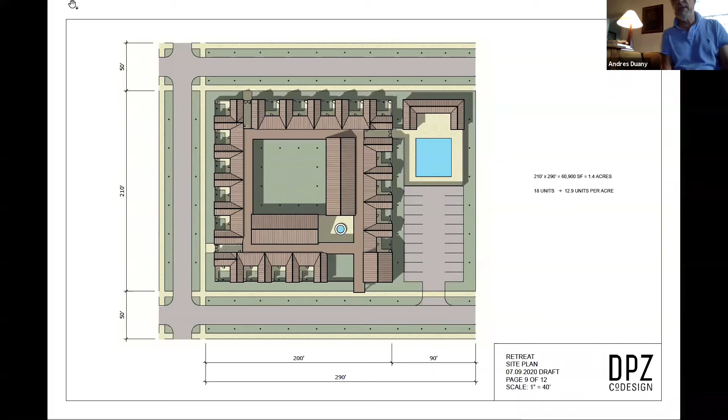We do have one question in already from an anonymous attendee who asks, how does this concept of the tough, unwelcoming, though attractive, compound dwelling unit fit in place in the South, where hospitality and features like front porches are so endemic to the culture? Will this be another symbol of modernity or pragmatism the South must slowly adopt?

I think the new urbanism has to consider this in its repertoire. It's not that the South or anybody has to adopt it. The problem with new urbanism is that its doctrine, which was useful - porches to the front, alleys to the back, and so forth - has become dogma. It used to be a very simple way to design that worked, but now it's become so that we can't even see these models that are in front of us. We can't see that young people love the warehouse look, you see? We have blinders on in terms of what's in front of us and what the 21st century is calling for. So it's not a matter of adopting it, it's just a matter of accepting it - and that's within our own organization.